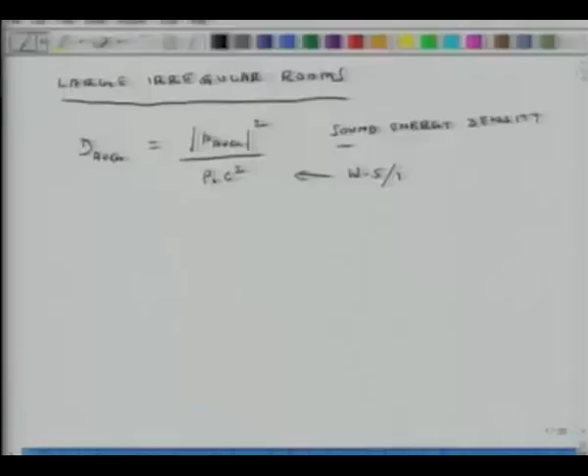D average is P average square over rho naught C square, and this is sound energy density, D average. The units of this guy are watt-second. Watt-second is energy or joules, right? And because it's density, it's for every cubic meter.

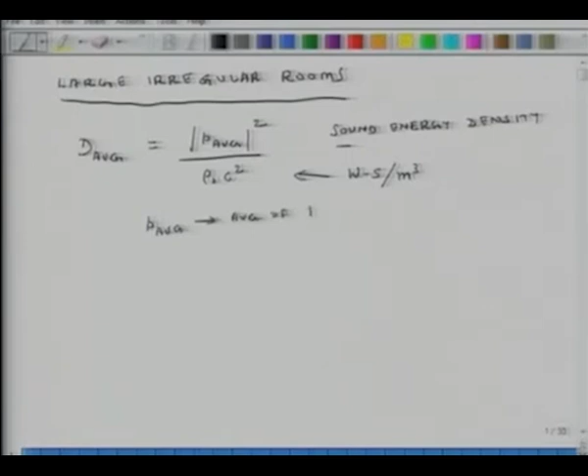A couple of things to note. P average is the average of RMS pressure in space and time.

What does that mean? So if I have a microphone, when I am playing music or people are talking, the microphone is sensing some pressure level. So I position a microphone at a point and record data for a few minutes, let's say 1 or 2 minutes, and then I take the average of the different RMS values. So for the first 1/10 of a second I find the RMS, for the second 1/10 of a second I find the RMS, and then I average it out.

So that is averaging the RMS pressure in time. Now I move my microphone to a slightly different location and do the same exercise, so then I am averaging it in space. So this P average is averaged in both space and time. You measure for a little longer periods of time at a couple of locations and then you get this P average, and it is again the average of RMS pressure. It's not the peak pressure, it's not the minimum pressure, it's the average of RMS pressure. And of course, rho naught is air density and C is the velocity of sound in air.

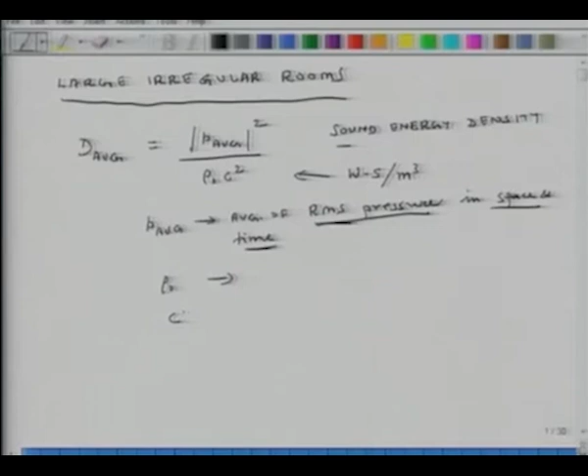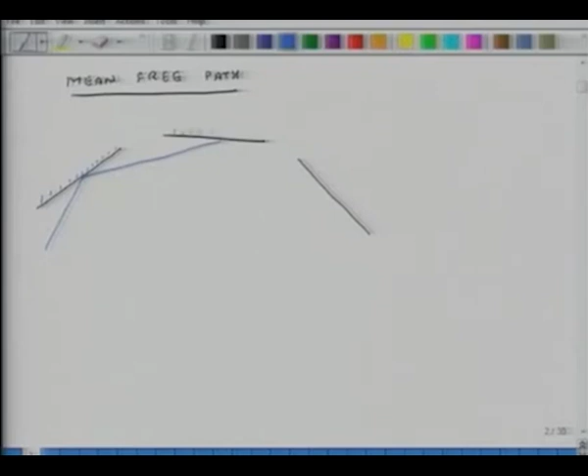That's my sound energy density. The second concept I will introduce, and this is a new concept, is mean free path. Let's consider a couple of walls in an enclosure. I have incident sound, it gets reflected by this surface, then it comes and hits another surface, it gets reflected again, and so on and so forth.

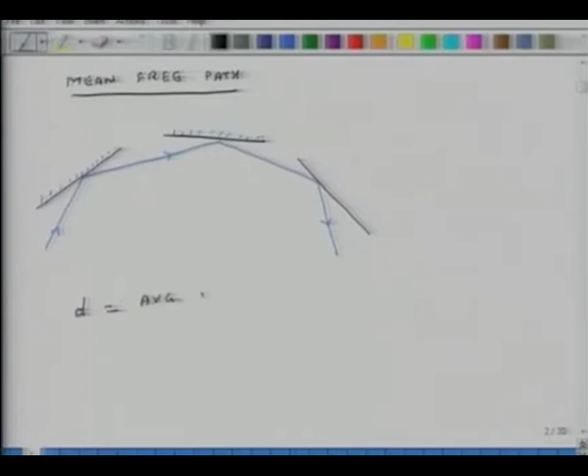The mean free path, I will define it as letter D, and this is the average distance between two reflecting surfaces.

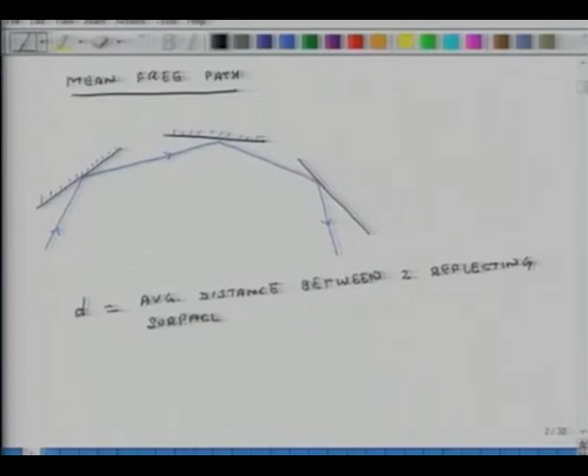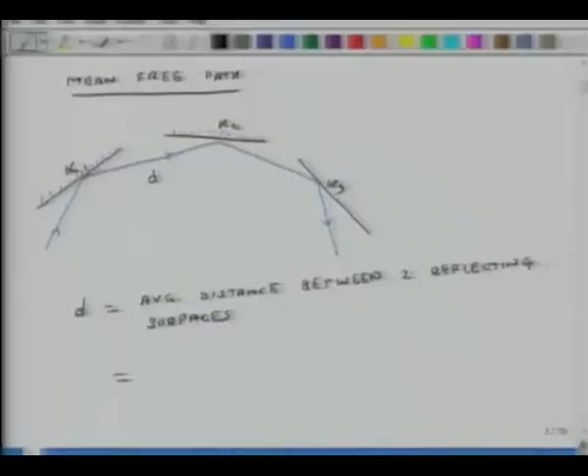So this distance could be D. This is reflecting surface 1 of absorption coefficient alpha 1. We will define and explain what these alphas are later, alpha 2, alpha 3. So between two reflecting surfaces, the average distance through which sound travels is D. And if I have to compute the value of D, it is 4V over S. How did we get this relation? V is volume of room, S is total reflecting surface area. This could be in meter cubed or feet cubed, and this could be in meter square or feet square.

The first acoustician to work on this was Knudsen. In 1932, he did some experiments and computed experimentally the value of D. He designed 10 to 12 different types of closed spaces, all irregular in shape and very significantly different from each other. What he found was that the value of D comes to 4V over S. Later, based on some statistical principles, people also did studies and from a theoretical standpoint validated the same expression. So this expression D equals 4V over S has both an experimental basis and a statistical basis.

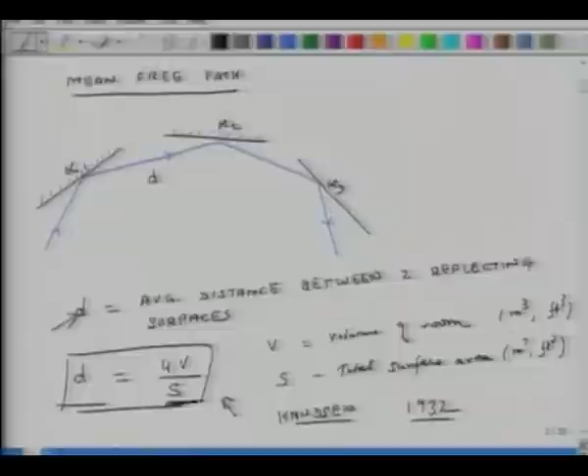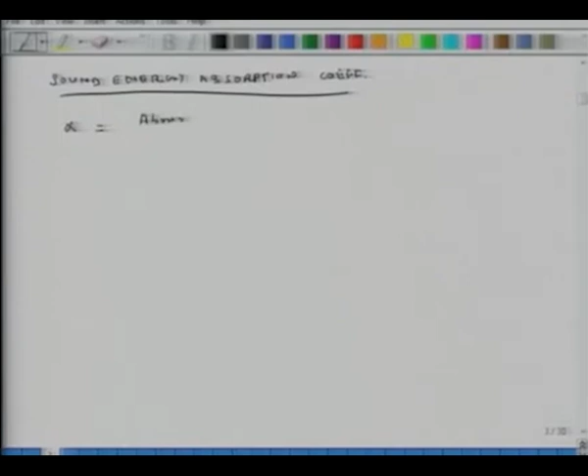So we have talked about D average, the mean free path, which is D. Now we will introduce another thing called sound energy absorption coefficient, alpha. Alpha is absorbed energy by a reflecting surface divided by incident energy.

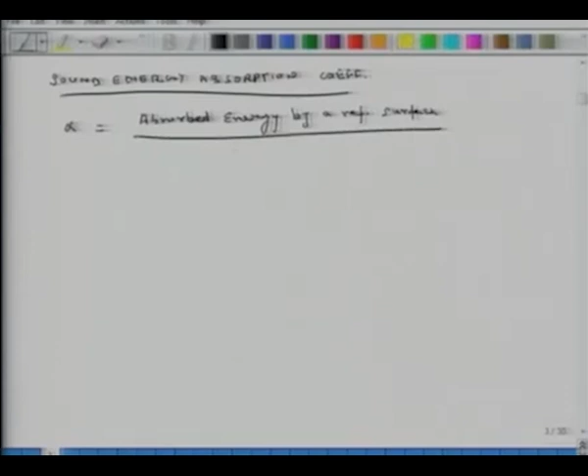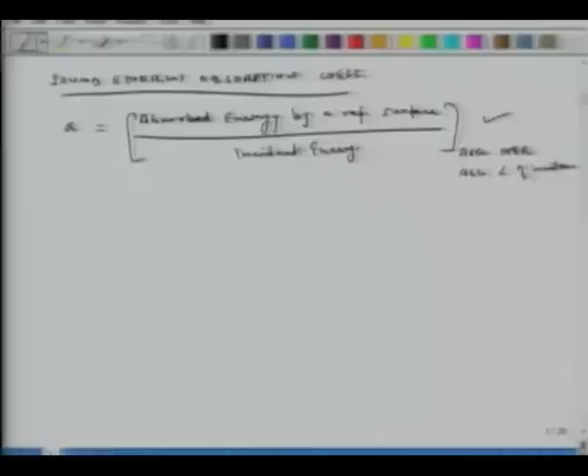And this I average over all angles of incidence, because the absorption coefficient will change as the angle of incidence changes. So whatever energy is being absorbed for different incident angles, I average them up and get the value of alpha. This is determined experimentally, so you find this value of alpha for different materials through experiments. The other thing you should know is that this value of alpha is strongly dependent on frequency, so it changes with frequency.

I will give you two examples. In the handout you have today, I extracted these two pieces of data. For example, this wood panel which is 2 to 4 inches thick has alpha equals 0.3 at 125 hertz, and that same value goes down to 0.10 at 4000 hertz. So it changes significantly with frequency.

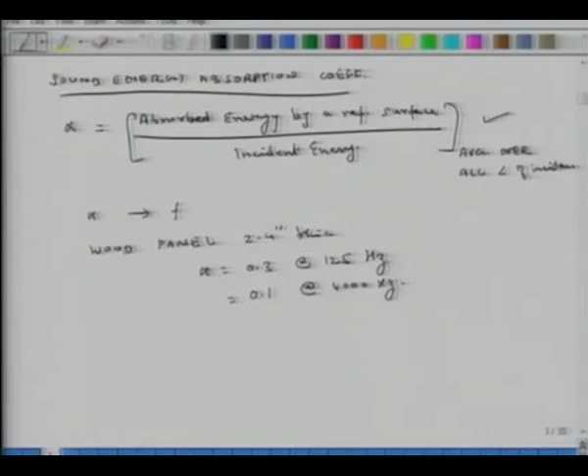And then I'll give you a counter example, carpet. It could be 5/8 inch thick, alpha is 0.2 at 125 hertz, and in this case it's going up at 4000 hertz.

So whenever we talk about alpha, the natural question is: alpha at what frequency? There are some materials where alpha is more or less constant over the frequency range, but most materials have very strong frequency-dependent behavior. So alpha always has to be discussed in context of a frequency number. In general, when people don't specify alpha, you may assume with a little latitude that it's for 500 cycles per second.

The third thing I wanted to mention is that this is a ratio of energies. It is not a ratio of pressures. It's a ratio of energies.

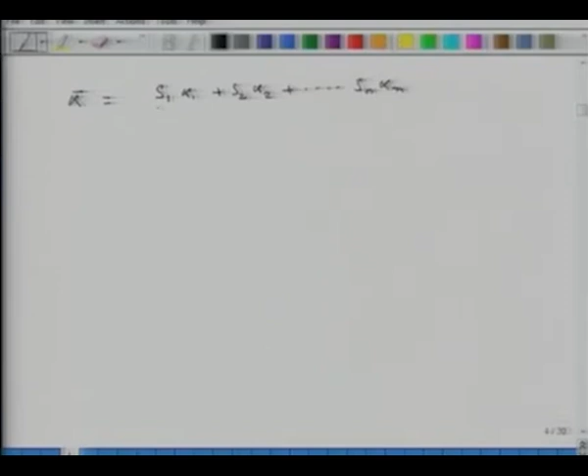So if I have an irregular room with lots of reflecting surfaces, I can compute an average alpha for that room. I take S1 as the first reflecting area with alpha 1, plus S2 alpha 2, for n surfaces Sn, over the total reflecting area in the room, where S equals S1 plus S2 plus Sn. Question: what would be the alpha or absorption coefficient of a window?

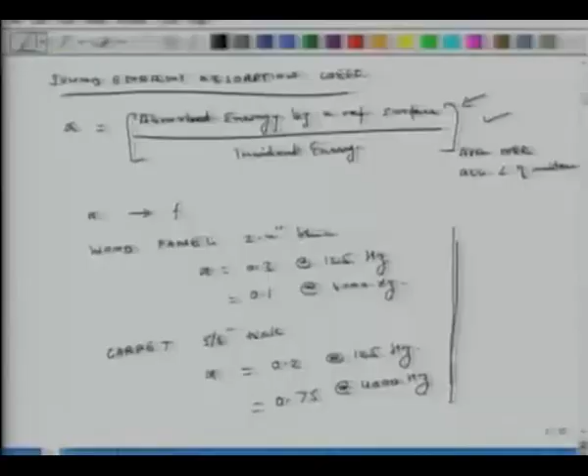An open window has alpha equal to 1. So if you have windows in your rooms, you should still account for those by prescribing an appropriate value. If it's closed or open, you have to assign accordingly; for an open window, alpha window equals 1. This is for an empty room.

If there's a room with people sitting in it, the handout provides values of alpha for individuals, whether sitting, standing, or on a chair, and so on. So if there are people in the room, the approximate average alpha would be S1 alpha 1 plus S2 alpha 2, plus Sn alpha n, plus alpha person times the number of people sitting or standing in the room, all over S. So this is with people.

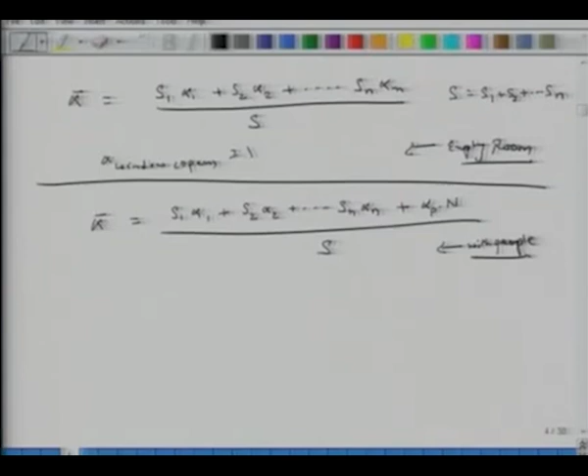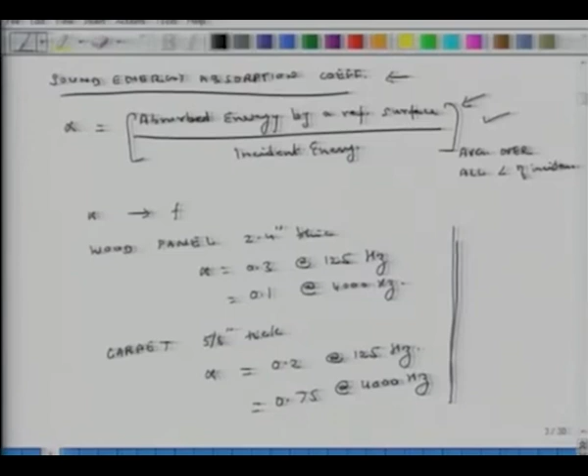Typically alpha P exceeds 1, 1.5, sometimes it goes up to 7 or 8. So we have talked about three concepts: sound energy density, mean free path, and sound energy absorption coefficient. A lot of times it is also called sound absorption coefficient. Using these three concepts, we will develop a property of a room which is large and irregular, and this property is called reverberation time.

We will designate it by a letter capital T. A couple of points: it is a metric, one of the metrics. A metric is a measure of large acoustic spaces. To figure out whether an auditorium sounds good or bad, this is one way of objectively calibrating yourself and saying that yes, this room sounds good, this room does not sound good.

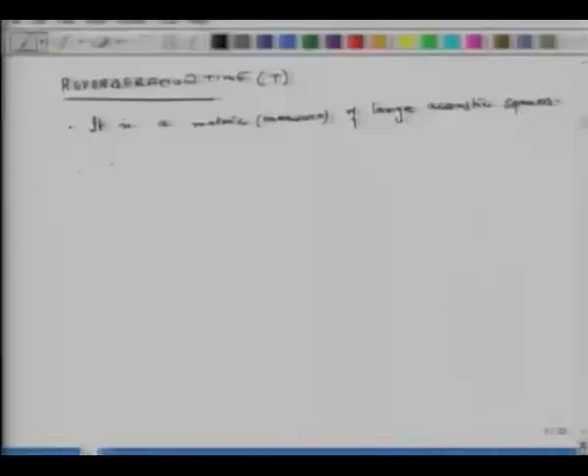Second thing, T is the time taken when SPL, that is the sound pressure level, which is fully developed, decays by 60 dB. What does this mean? You have an auditorium or lecture theatre, and you start the sound system there, or if people are talking, let that happen, and at a particular point you place a microphone and you will see that after a certain period of time the sound pressure level will stabilize. Once it has stabilized, you turn off the source and the sound pressure level will start decaying very fast. So the time it takes to go from that P naught condition to P naught minus 60 dB, that time is called the reverberation time of that room.

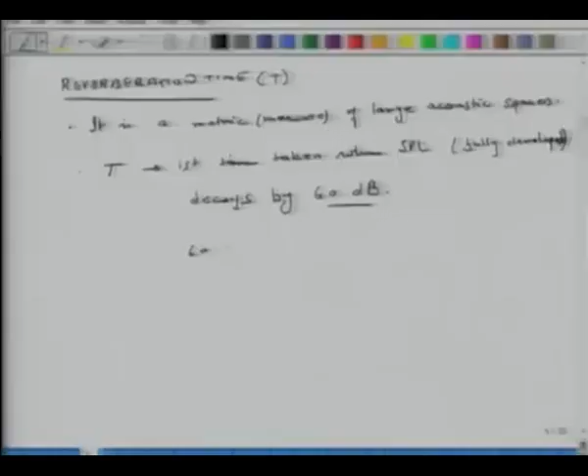What is 60 decibels in pressure? Two pressure values are off by 60 decibels. It means what is the ratio of pressure in absolute terms? It is 1000. 60 dB corresponds to PT over P naught equals 1000 to the power of minus 1. And if I am computing the ratio of energies, that ratio is 10 to the power of minus 6.

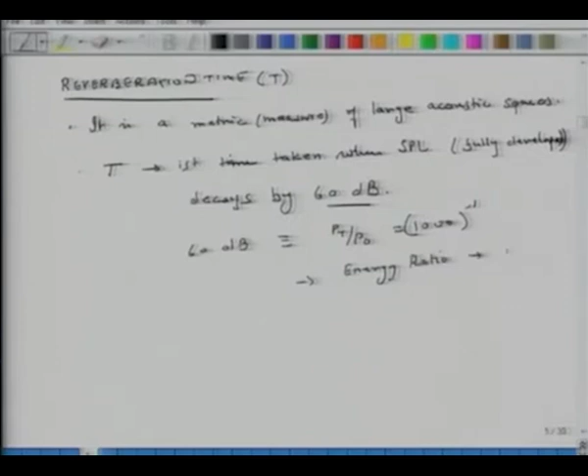Using this understanding, we will start now doing some math. So again, we will draw three surfaces. All these three surfaces are reflecting, and they also absorb some sound. So let us say the absorption coefficient of this surface is alpha 1, this surface is alpha 2, this surface is alpha 3, such that the overall room's absorption coefficient is alpha bar.

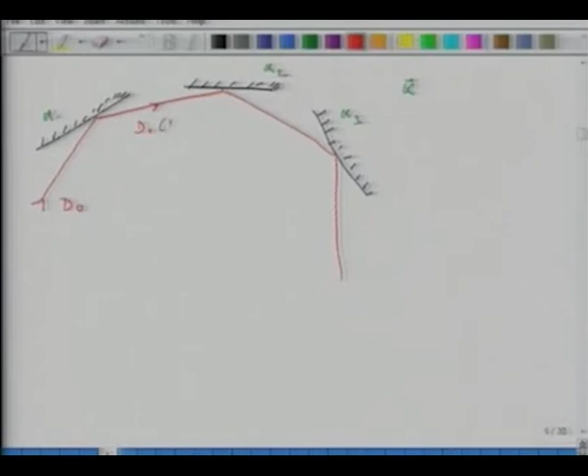That is my incident sound. It gets reflected, again gets reflected again. The intensity of incident sound is D naught. What will be the intensity of sound after it gets the first reflection? D naught times alpha got absorbed. What is remaining? 1 minus alpha. This guy becomes D naught times 1 minus alpha squared. This is D naught times 1 minus alpha cubed.

These are, in a statistical sense, this alpha is the average alpha for the room. In a more precise way, yes, you are right, it will be D naught times 1 minus alpha 1 times 1 minus alpha 2 and so on and so forth. But in a statistical sense, I am just using alpha average, alpha bar.

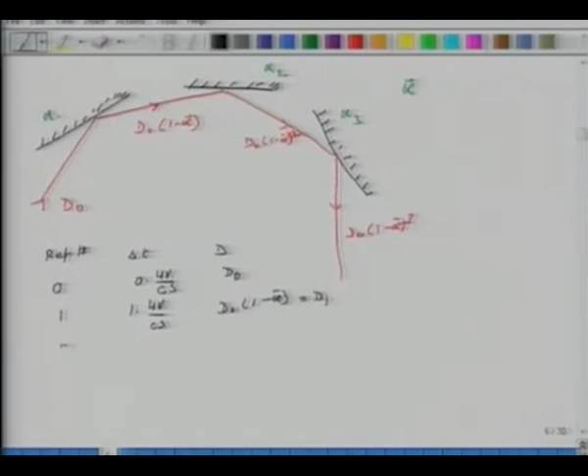At first reflection, so actually this is my reflection number. At first reflection, delta T is 1 times 4V over Cs. This is D naught times 1 minus alpha bar, this is D1. Second reflection, delta T is 2 times 4V over Cs, and this is D2 equals D naught times 1 minus alpha bar whole square. At the Nth reflection, it is N times 4V over Cs, Dn equals D naught times 1 minus alpha bar to the N.

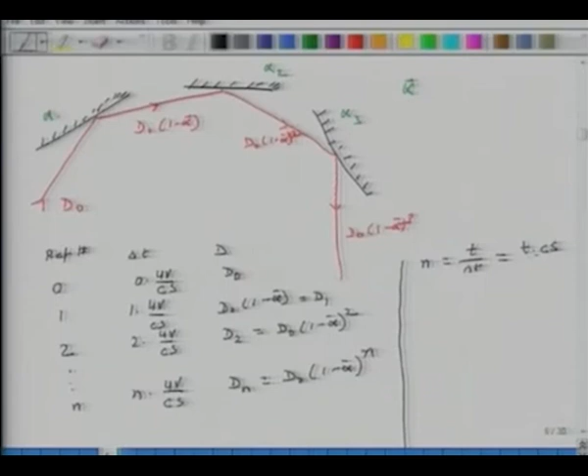Now we know that we can also write N as the total time elapsed, which is T over delta T, and that is T times Cs over 4V. So with that understanding, I can express at any given time the sound energy density as dt equals d naught times 1 minus alpha bar raised to Cs over 4V times T. I can again reframe it as an exponent of log of 1 minus alpha bar.

So if I plot dt with respect to time, I get this kind of relationship, an exponential decay relationship. So this is, in irregular rooms, we had developed a relation for the envelope of decay.

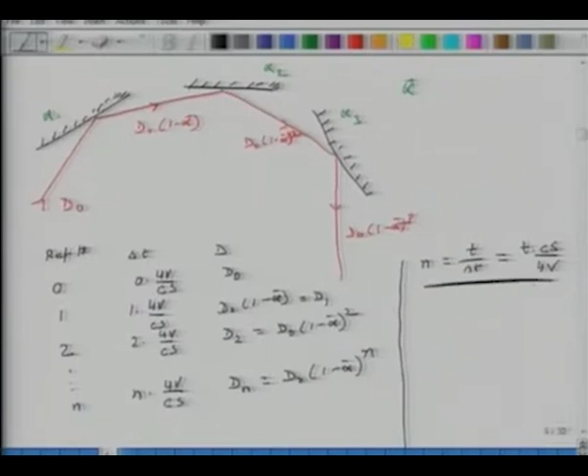In this case, the envelope of decay is also giving you the exact value of pressures at different times, of sound intensity at different times, because reflections are happening all the time and the overall field in the room is diffuse. The other thing is, we made this jump N equals T over delta T, and this is because the room is irregular, so the values of delta T do not increase in quantum, they are continuously changing.

So this is also a continuous variable. In the earlier case where we had parallel walls, this T was changing, reflections were happening and T was progressing in one quanta, second quanta, third quanta, and so on and so forth. Here it's a continuous variable. So that's my envelope of decay.

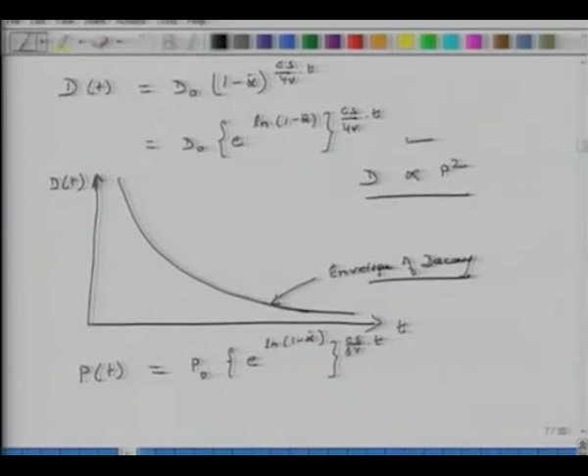We know that D is related to energy, so it is directly proportional to P square, pressure square. So I can also say that pressure in the room will also decay in a similar exponential factor such that it is P naught E log 1 minus alpha. But what will be the value of Cs here? Cs 8V T. So instead of 4, I am putting an 8 here because the relationship between D and P is a square relationship. So I label this expression as 1.

We know that sound pressure level in decibels is 20 log base 10 of P RMS over P ref, where P ref equals 2 into 10 to the power of minus 5 newtons per square meter. So what is it that we are trying to do through this entire exercise? We are trying to develop an expression for reverberation time. So we don't have to forget that.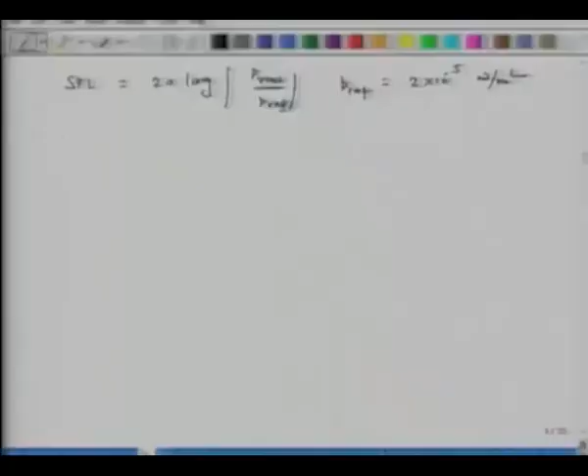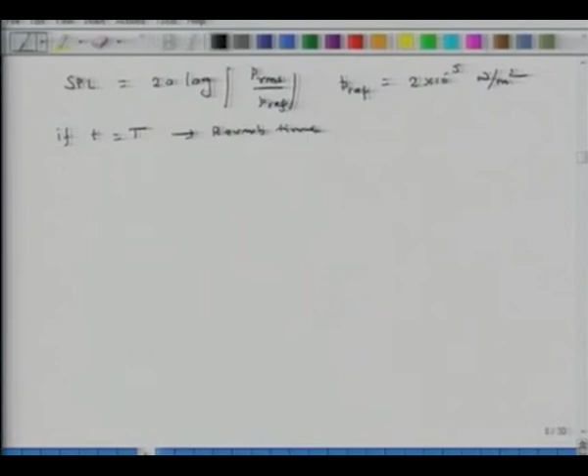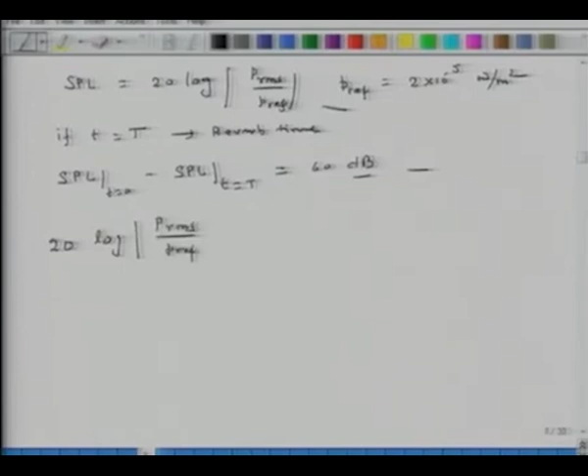So if T equals T, which corresponds to reverb time, then SPL at T equals 0 minus SPL at T equals T, what is the difference? 60 decibels. So I put this relation in this equation, and what I get is 20 log P RMS over P ref at t equals 0 minus 20 log P RMS over P ref at t equals T equals 60 dB.

And I can rearrange this as 20 log P RMS at t equals 0 divided by P RMS at t equals t is 60. What is P RMS at t equals 0? P naught. What I get is 20 log. So basically what I get is this thing.

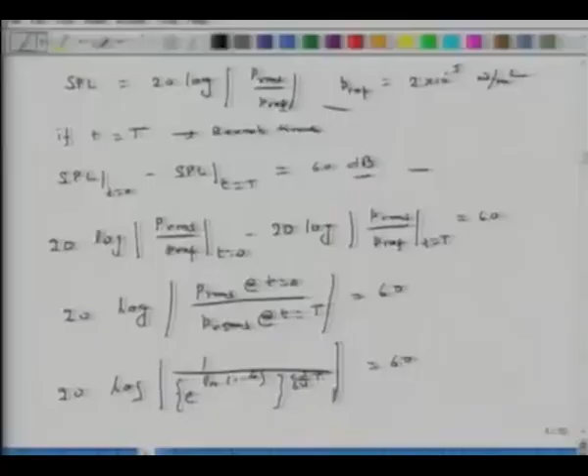E ln 1 minus alpha bar, and the whole thing is raised to the power of Cs over 8V times t. Can everyone read this? I did some micro typing there. It could be read? Okay. So just to make sure, 20 log 1 over exponent natural log 1 minus alpha in parenthesis, the whole thing raised to the power of Cs over 8Vt.

So now I do some mathematical manipulations. I get 20 log E minus ln 1 minus alpha, Cs over 8V times t equals 60.

So now I take the log, and what do I get? 20, I take log of this guy, so I get minus ln 1 minus alpha times log of E times Cs over 8Vt equals 60. So I get 20 log of, this log is in base 10, so log of times 0.434, that's log of E divided by 8.

So I am pulling these three together, times minus ln 1 minus alpha times S times Ct over V equals 60. So this entire thing becomes 1.086 times this entire expression times Ct over V equals 60, and I call this expression A prime.

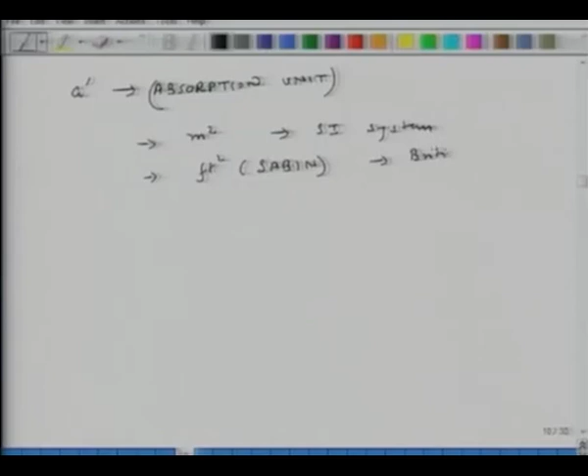And A prime is called absorption unit. The name is absorption unit, it is not a unit of something, the name is absorption unit, and the unit of this absorption unit quantity is meter square in SI system, and feet square, but more popularly it is also called Sabine, Sabin, in the British system. Sabine is feet square. And A prime is called absorption.

A prime is a property of the room, because what is it? It's basically S times a function of alpha, and essentially it tells how much sound is overall getting absorbed, say that T is 55 times V over A prime C, and we can rewrite, because we know the value of C, so we can rewrite the same equation as

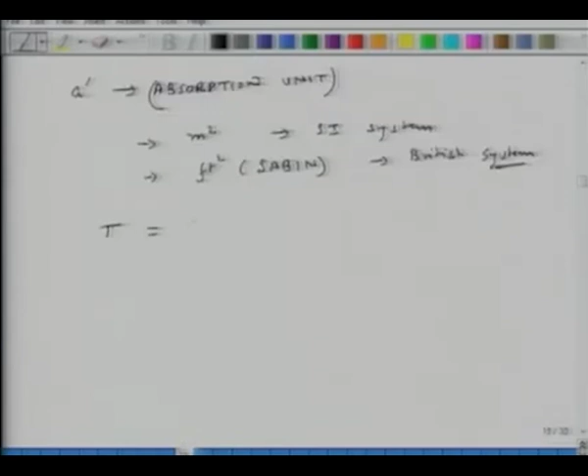T equals 0.161 V over A prime. And this is a very famous equation in architectural acoustics. It's called Sabine's formula.

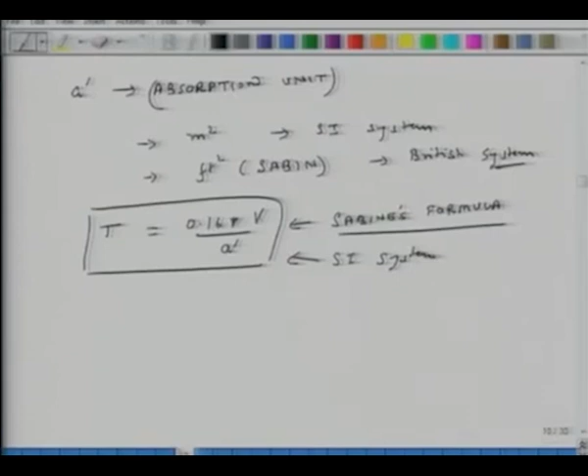It's named after Sabine, who in 1898 in Boston measured coefficients for reverb time. This formula should work in both systems, so you have to change the constant. This is for the SI system, but you can change it. The constant will change, but the formula will still be called Sabine.

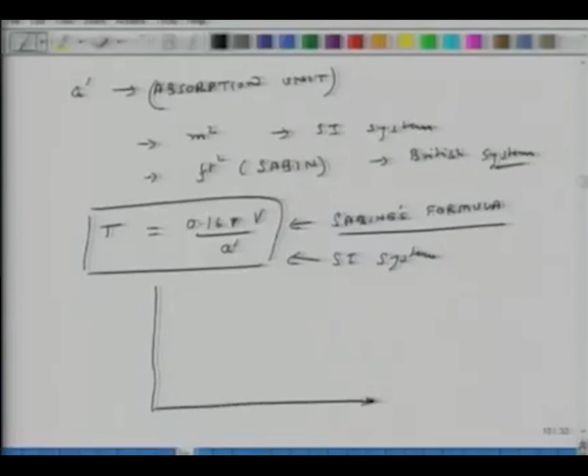What Sabine did is he took an axis and was plotting this V over A ratio, and what he found was that this is a hyperbolic relationship. From that he said, okay, I can extract this value of T. He was doing that numerically. He was probably not playing with this 0.161 parameter directly, because that comes out naturally once you plot this entire hyperbola.

So this looks like a very simple relation. There are only three terms in it, T, V and A, and it looks very deceptive, but it has a lot of substance in it.

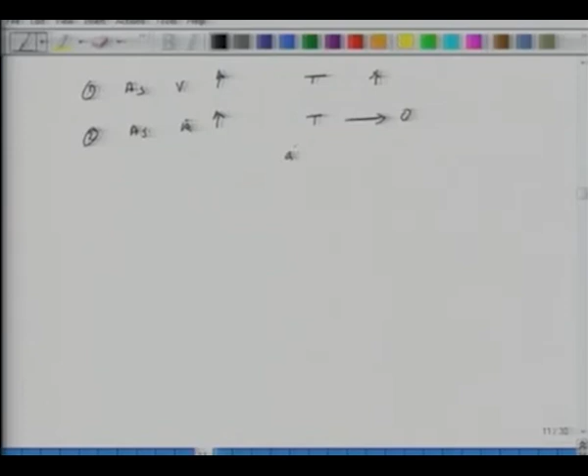One thing is that as V goes up, T will go up. Second, as alpha goes up, what happens to T? It goes towards zero. Why? Because in this A prime, you have logarithm of 1 minus alpha, so this goes towards minus infinity.

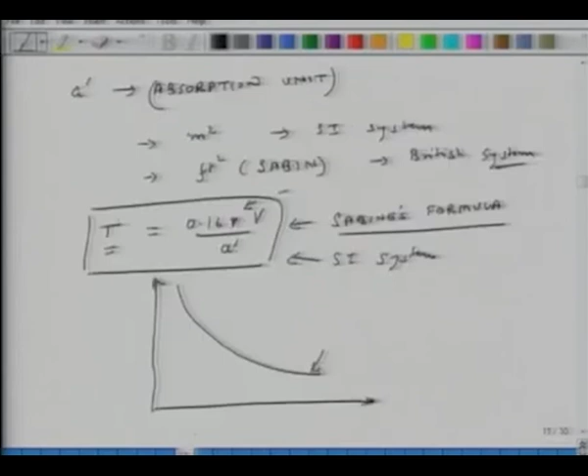The third thing is that this relation is dependent on frequency, so each room will have different reverb constants for different frequencies, because alpha depends on frequency. In this entire analysis, we've only assumed that sound is absorbed only on the reflecting surfaces, and that during movement from one surface to another, nothing is absorbed. But in reality, air also attenuates the overall sound pressure level, so this formula needs a little calibration to account for absorption of air. But even without that, it's a fairly good relation.

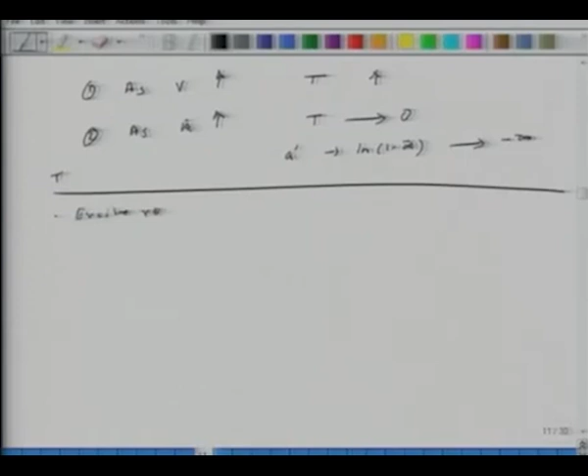So we had talked about how you measure T. First, you excite a room with some sound source till the SPL is stabilized. It takes a little time for the sound pressure level to converge and become flat, and then you switch off the sound source.

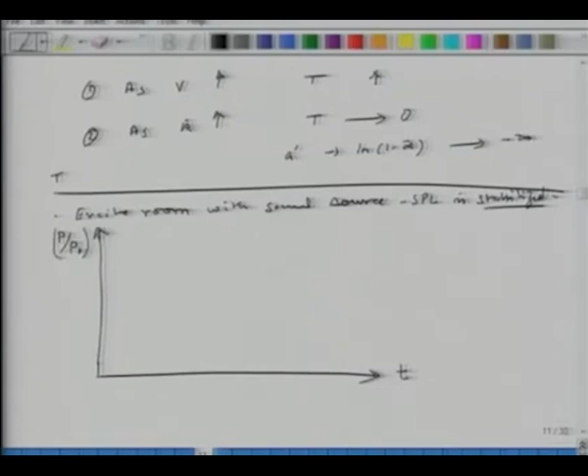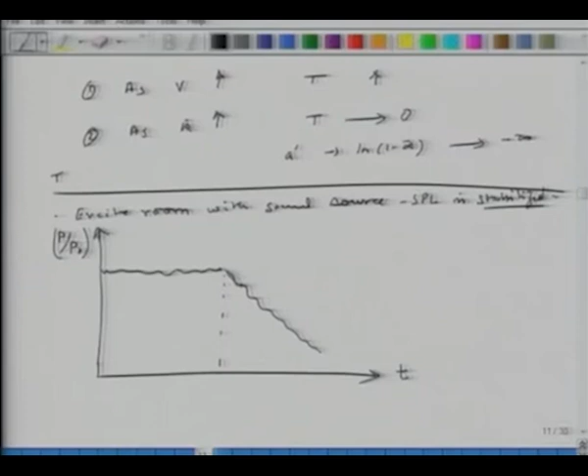So what you get is something like this: if I'm plotting P over P naught in decibels, when exciting, it becomes stable after a while, then I switch it off, and the sound pressure level decays like this. If this is my reference at 0 dB, and this is minus 60 dB, then this value of time is my reverb time. This approach of measuring T is called the switch-off method.

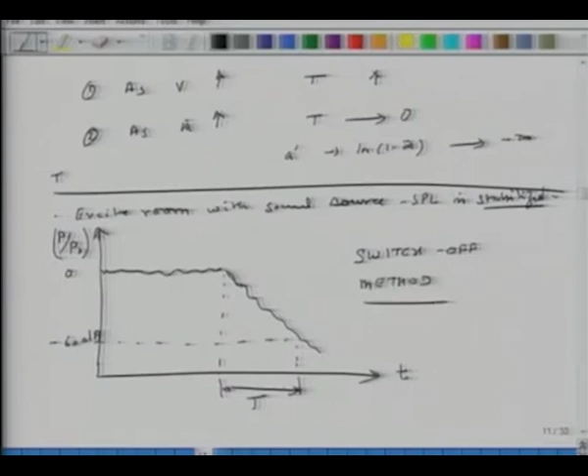I want to make a couple of qualifications in this entire discussion or analysis. One is that this theory is good to the extent that the sound field is diffuse—it's well distributed throughout the room. So that is one requirement, that we need a diffuse field.

Second, the room should not only be irregular, but it should also not have focusing elements. What do I mean by a focusing element? For instance, with light, I can have a concave mirror which will focus light in a particular way. Similarly, I can have surfaces which focus sound at particular locations, so I do not want any focusing elements in the room—that would kill the smoothness of SPL distribution in the room. Surfaces could even be a little curved, but they shouldn't overtly focus on one particular area or zone.

Third, the total absorption coefficient should be small or moderate. What does that mean? If my alpha bar is fairly large, it does not take a lot of reflections for the sound to decay to a level which is not measurable. So alpha has to be not too large—it could be fairly small, but it shouldn't be large. For instance, if there's a room with all windows open, practically only having windows, then this reverb time and all this discussion becomes meaningless.

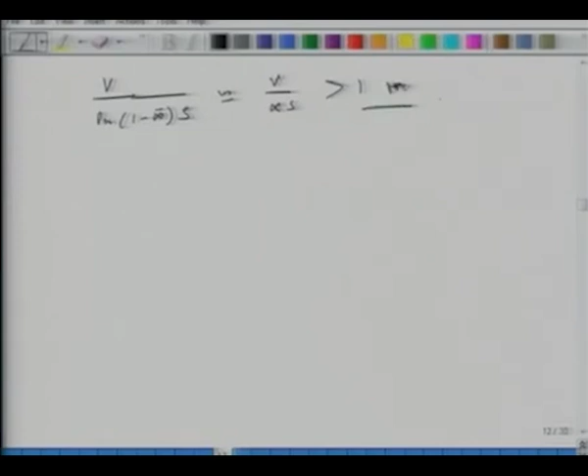One way to quantify that the room's absorption characteristics are moderate or small is that V over log of minus 1 minus alpha S, which is V over alpha S, is greater than 1 meter. If you go to the lecture hall complex, you hear a lot of echoes, especially in L1 and some larger rooms. Whenever a professor is teaching, the sound is not clear, and I think the biggest challenge there is the reverb time—it's too large.

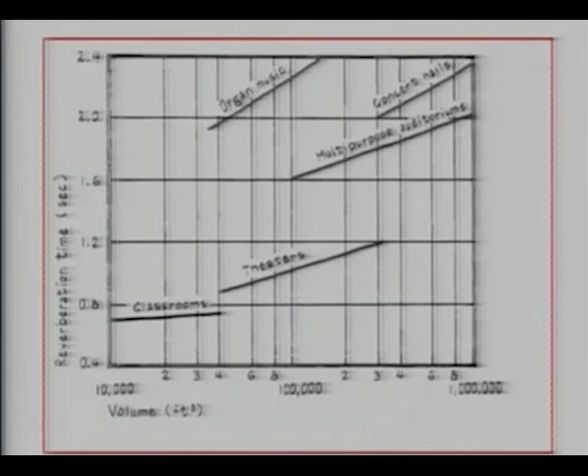What you are seeing here on this plot is typical recommended reverb times for different applications. For instance, a classroom where most of the frequency content is in the bandwidth of speech, about 0.8 seconds is the optimum time. If a classroom's reverb time is significantly larger than this, the speech will not necessarily be intelligible, won't be understood easily. Similarly, theaters with a mix of music and speech need a little larger reverb time. And concert halls, where you want a good amount of reverberation, have times in excess of 2 seconds and so on.

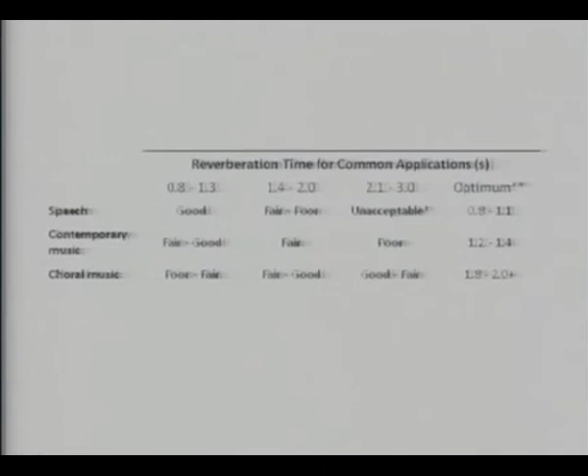So this is another chart. It shows in some quantifiable ways: for speech, 0.8 to 1.3 is a good reverb time, 2 seconds is certainly unacceptable. Even 1.4 to 2 may be poor or fair. For pure music, I need a little higher reverb time. If the reverb time is too low, the sound does not excite human emotion as much.

This is a diffuse field. Yeah, the field is diffuse. Are you considering a single 1D source, like a wave? It could be omnidirectional, or unidirectional—because rooms are irregular, regardless of whether the source is omnidirectional or unidirectional, at the end of the day sound will be moving in all directions at all frequencies.

In case a window is open, and after some reflections sound goes to the window—if a unidirectional source is there, what will be the reverberation time? Again, because of the irregularity of the room, by the time it reaches there, unless you are directly projecting sound towards the window, which is a totally different case, the sound field should have become diffuse enough by the time it reaches. So there's no very hard objective cutoff, but this is an approximate answer.

What happens if the reverb time is too low? Let's say we are talking in this room, and the reverb time is, say, 0 seconds. What does that mean physically? It means the person speaking has to make more effort to be heard. So you also need some reverb time—0 is not good because that requires more power from the person or the sound system.

But if it is too high, then if I say 'cat,' by the time I am saying 'ta,' the 'C' will also overlap with 'ka.' So it will become confusing. Another parameter which we can extract if we know the reverb time of a room is called the bandwidth or Q of a room, and we will talk about it.

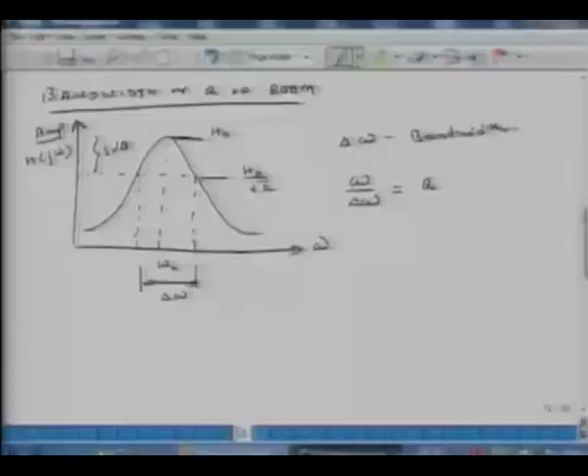So associated with this is a parameter called delta omega, which is called the bandwidth. Omega over delta omega is called Q—it's an industry standard term. Even in vibrations you hear this term Q: what is the Q of the system? So if there is no damping in the system, what does Q become? Infinite—Q becomes infinite when there is no damping, so Q is also a reflection of how damped the system is.

At omega equals omega naught plus or minus delta omega over 2, my energy is half, and the direct variable H—which could be pressure, velocity, or displacement—is 1 over root 2. So this is the bandwidth.

Now the question is: if I have a room with a diffuse field in it, what is the Q of that room? So we will try to use this concept, along with the idea of reverberation time T, to figure out the value of Q of a room. There is an intermediate step to get to that answer.

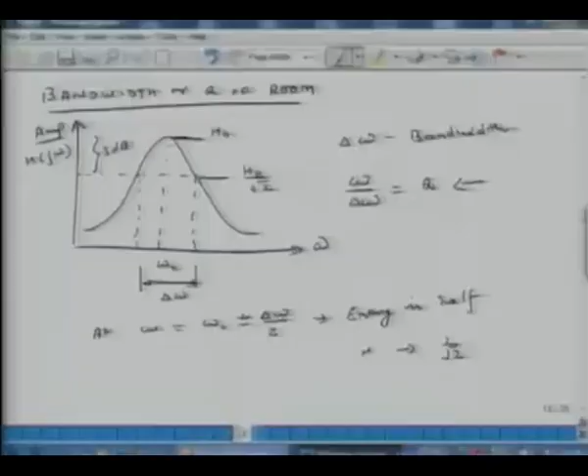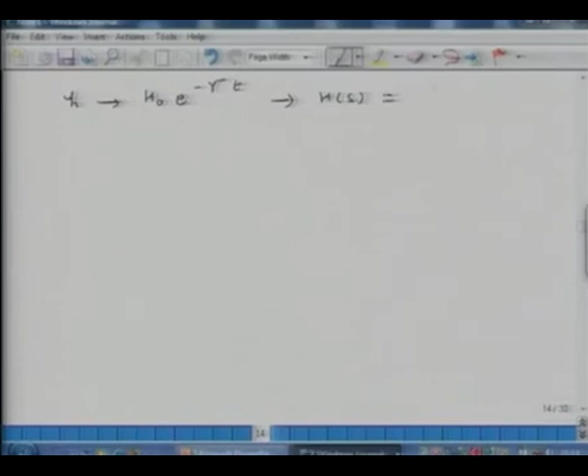Let us say you have a signal H naught times E to the minus gamma t. The Laplace transform of it will be H of s equals H naught over s plus gamma. So we will plot this.

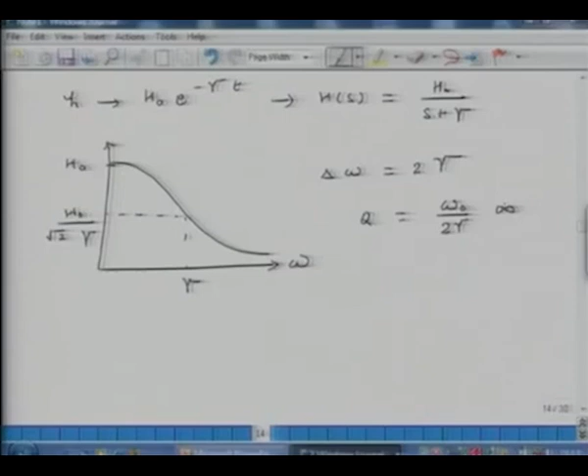And we get something like this. This is my H naught. This is H naught over root 2 alpha, and this is alpha. Then bandwidth is 2 alpha, and Q... oh I'm sorry, this should be gamma. So Q is what? Omega naught over 2 gamma. In this case it is infinity because omega naught is 0. This is my omega naught. But the point is that if I have an exponential decay form, then my bandwidth is 2 gamma.

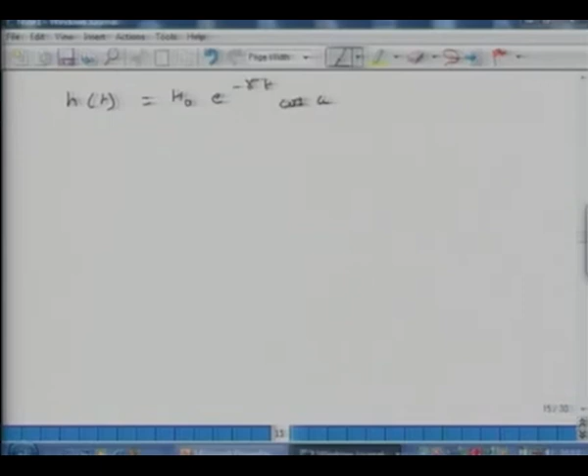So now we go to a diffuse room, and in a diffuse room my h(t) signal, as we developed it, is H naught e to the minus gamma t cosine omega t. What this means is that if I have a room, and I started playing a tone of omega naught in that room till it became stabilized, and then turned it off, the signal in the room will decay in such a way. It will still be cosine omega t, but it will decay over a period of time in an exponential way, e to the power of minus gamma t. That is what it means.

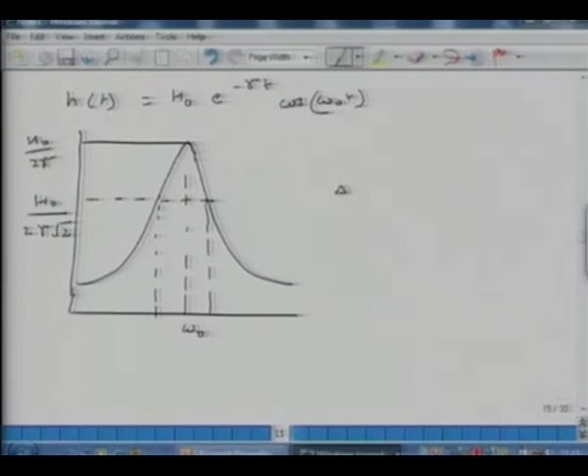This should be a little not that sharp. So, my center frequency is omega naught, and this is h naught over 2 gamma root 2. This is h naught over 2 gamma. So essentially, my bandwidth of a room is 2 gamma, and the Q associated with the frequency which is getting excited in the room is...

Now in case of our room, we know that gamma is minus ln of 1 minus alpha bar, times Cs over 8V. Remember it's 8 because we are not plotting the energy in this case, we are plotting the fundamental variable, pressure or displacement or whatever. So I can use this to figure out the overall Q of the room.

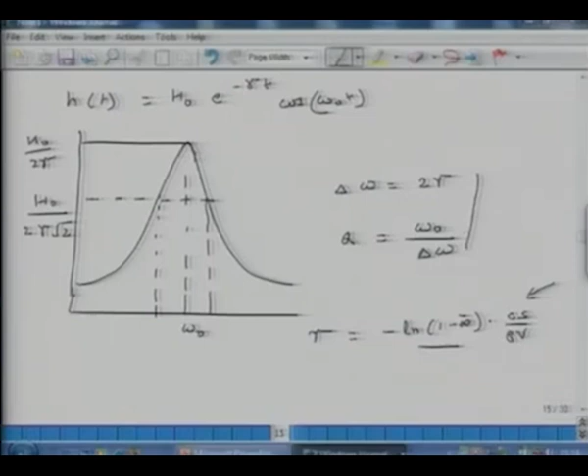We will do a very quick example. Let's say my T equals 2 seconds, this is the example. Omega naught is 100 hertz. Then what is the bandwidth and what is Q?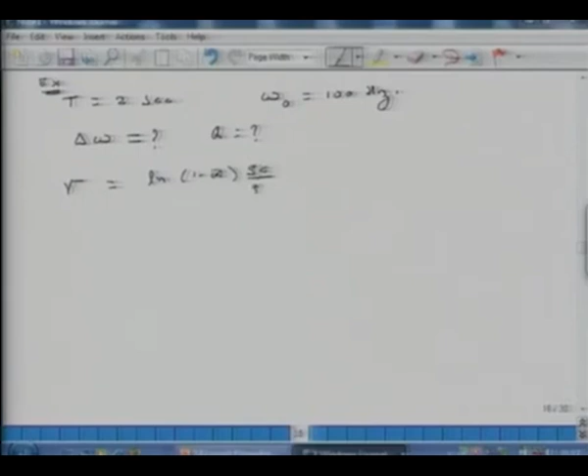So we know that gamma is ln of 1 minus alpha bar, Sc over 8V. This is basically A prime C over 8V. We also know that T is 55V over 8T, AC, A prime C. So this gives me A prime C over V, which I will introduce here. AC over V is 55 over T. So now I put this here, and gamma is 55 over 8T, and that gives me gamma equals 55 over 8 into 2, equals, the number comes to 3.4 seconds. So gamma is 3.4 seconds.

And delta W was 2 gamma, is 6.8 seconds. Gamma is in radians. Yes, and that translates to 1.0942 hertz. So Q equals omega naught over delta W equals 100 over 1.094, that's approximately 90 hertz.

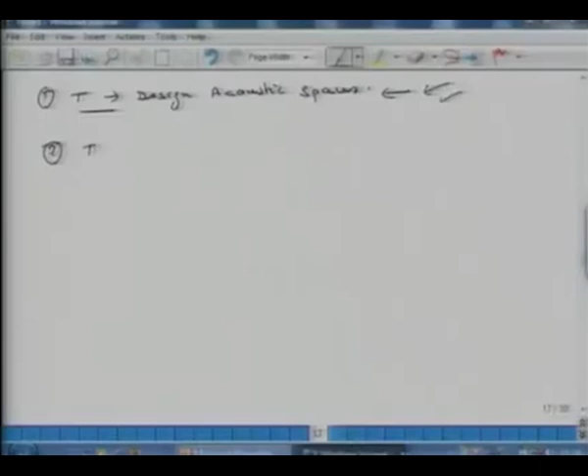So we'll quickly cover that. Aim is to measure alpha of an unknown material. So step 1, we take a fairly diffuse room which does not have a high absorption characteristic, and then find the reverb time of that room without this material in it. So find T without the unknown material.

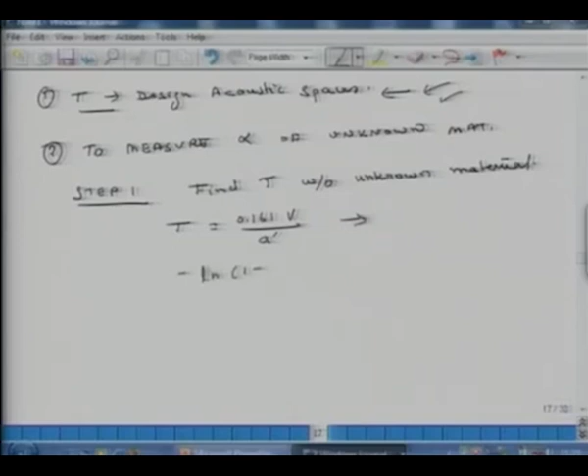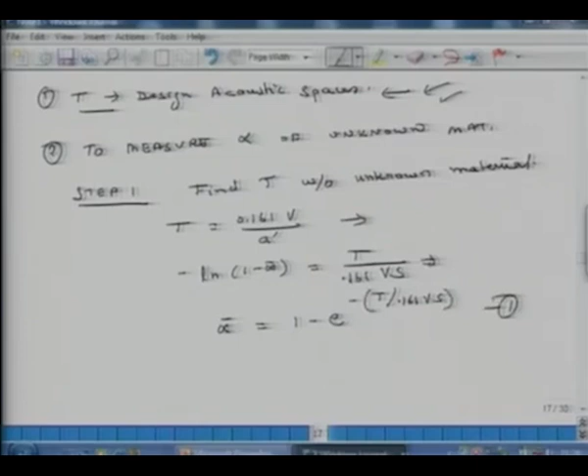So T equals 0.161 V over A prime, and if I do the math, I get minus ln(1 minus alpha bar) equals T over 0.161 times V over S, where S is the surface area. I know the surface area of the room, so I can get log alpha from this relation, and I can also get alpha bar for the room without the material, which is basically 1 minus e to the minus T over 0.161 V over S. So I know alpha bar for this room. From T I can figure out the alpha bar for this.

Then step 2, I do the same measurement and find alpha new. So in the same room, now I place this material, I know the surface area of the material, and I find alpha new. So from alpha new and from alpha, I can extract the value of alpha of the material. How do we do that?

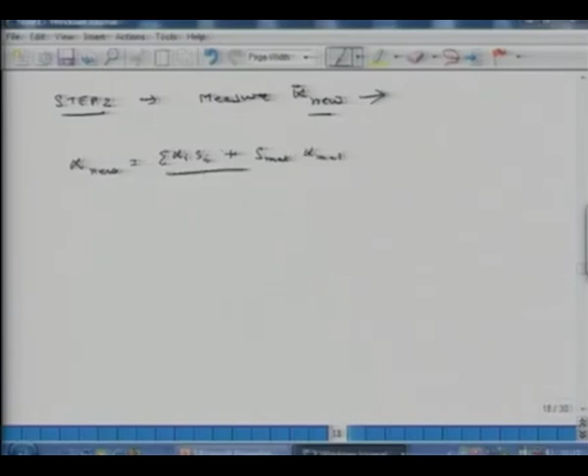So that's exactly what we'll do. Alpha new is basically S_i alpha_i plus S of the material, where alpha_i is only for the room alone, S material and alpha material, divided by S plus S mat. So this is basically S_i alpha_i over S plus S mat, plus S mat times alpha mat over S plus S mat.

I do not know alpha mat. I know everything else. Also, I do not know this quantity as one single entity, right? I know alpha_i, but I don't know this entire thing by itself, because this is different than the alpha of the room. So what I do is S_i alpha_i over S times S over S plus S mat, plus S mat times alpha mat over S plus S mat.

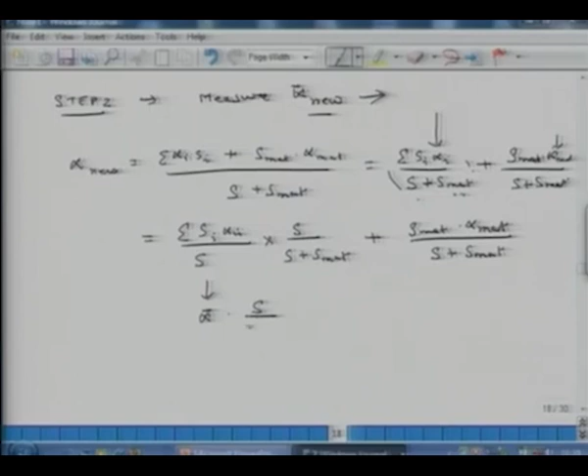What is this term? Alpha bar times S over S plus S mat. So I know this, S mat over S plus S mat times alpha mat. Now I know everything. I know all these blocks, and this is the only one which I do not know. So I can figure out alpha mat in this way.

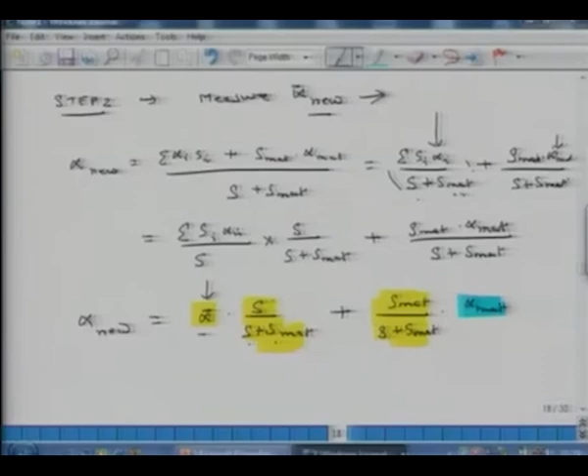So this is another application. The reverb time has usage in terms of designing architectural spaces, also characterizing materials, also developing targets for different types of rooms. Once again, it's dependent on frequency, and the choice of the right reverb time for a particular acoustic space depends on how we are going to use that space. So if I have a room I will use only for talking, I have to shoot for one particular value of T. If I have to use it only for music, then maybe another value of T. If I have to use it for a mixture of applications, then my target has to be different.

So that's all I wanted to cover today, and then we'll meet next.